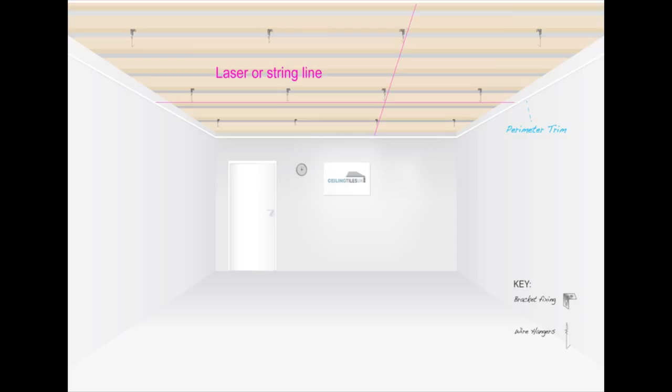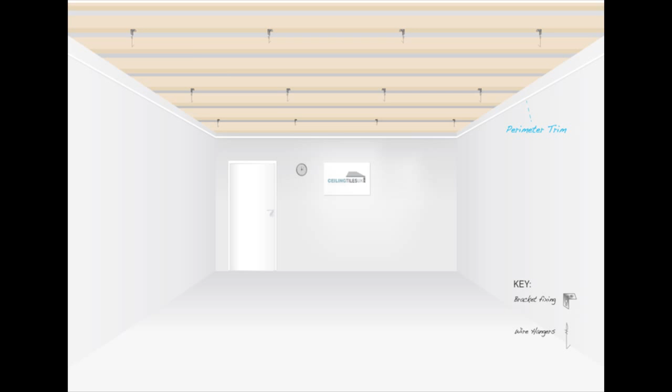Once all the wires are in place, you can begin installing your main runners. Measure and mark out the position of each main runner along the perimeter trim. Begin with your first main runner, which is the one closest to the perimeter.

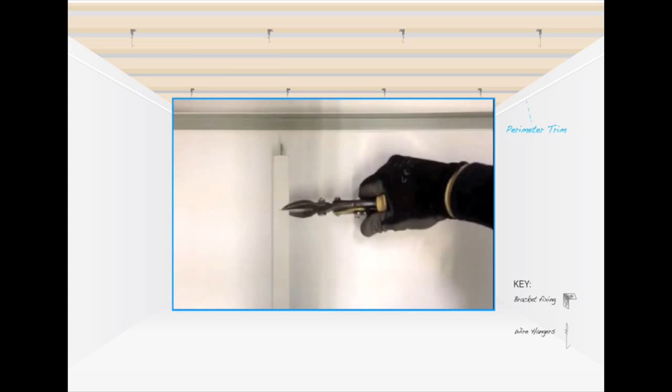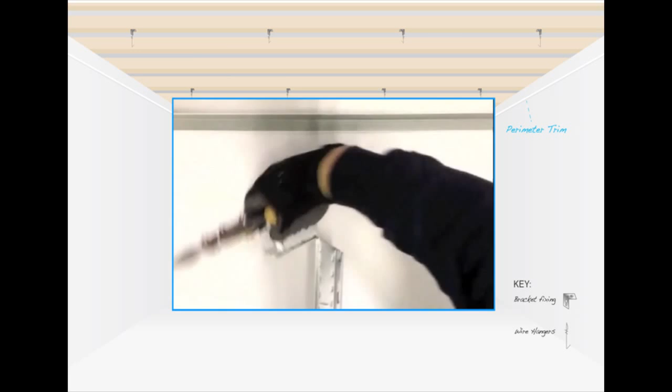The clip on the end of the main runner will have to be cut off so that it will rest flush to the wall and on the perimeter trim. Don't forget to use the appropriate health and safety equipment for your site, as specified in our planning video. When cutting main runners, for example, gloves and protective glasses are particularly important.

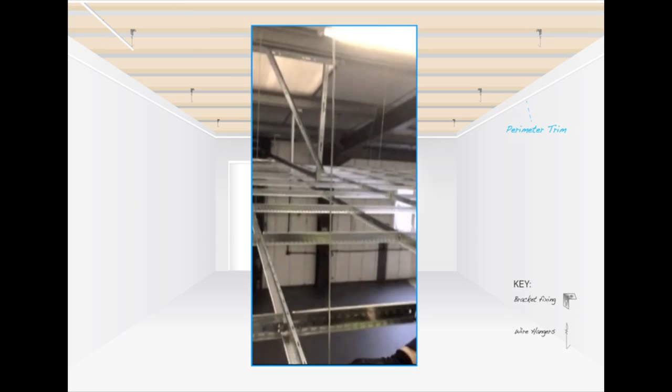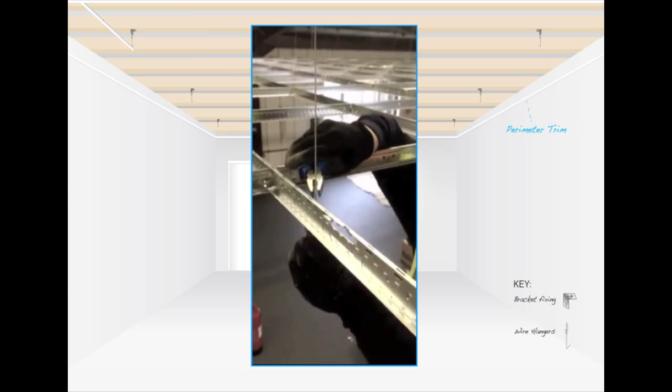Starting from the wall edge, work outwardly, hooking the main runner onto the fixing wires and curling the wire back on itself for a secure fixing. Install the main runners so that they are all level with the perimeter trim already mounted.

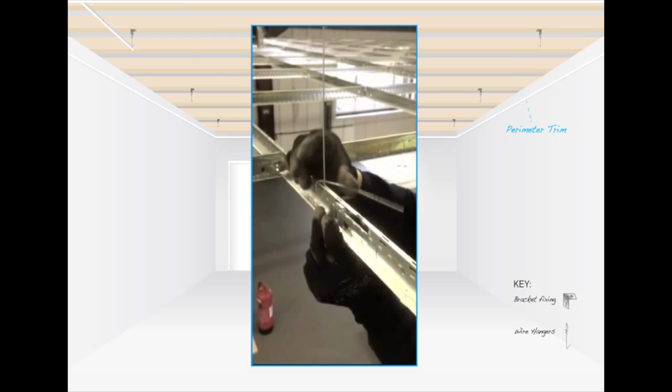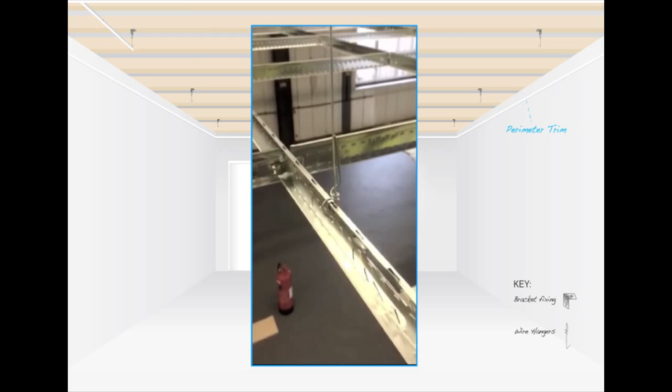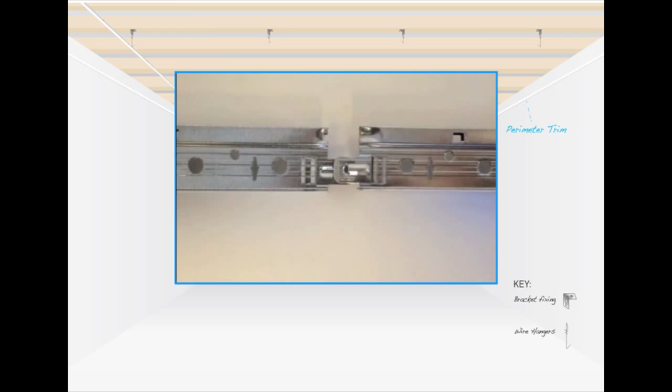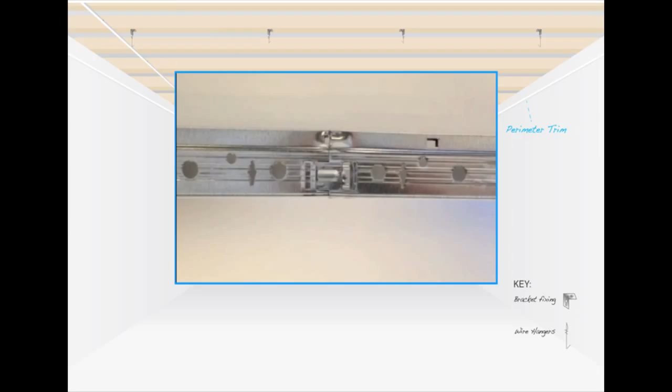If the room you're installing is shorter than 3.6 metres, cut the main runner to size. If your room is longer than 3.6 metres, the main runners can be joined. Ensure that the slot for the first cross tee is in line with the location of the cross tee as per your drawing.

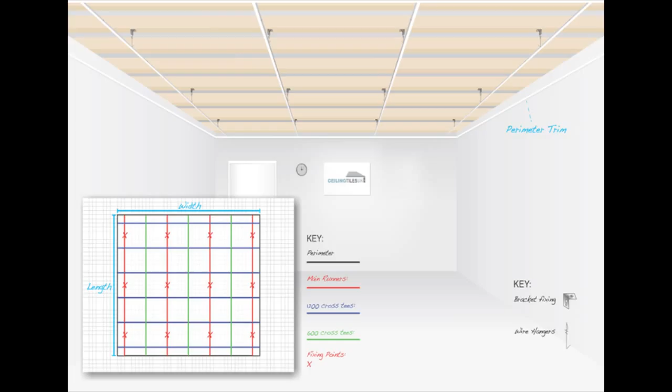Once the first main runner is complete, use any offcuts to start the second row. This will stagger the expansion points, creating a stronger ceiling. But remember to ensure there are slots for cross tees in the correct positions. Once all main runners are installed, you can fit the 1200 cross tees.